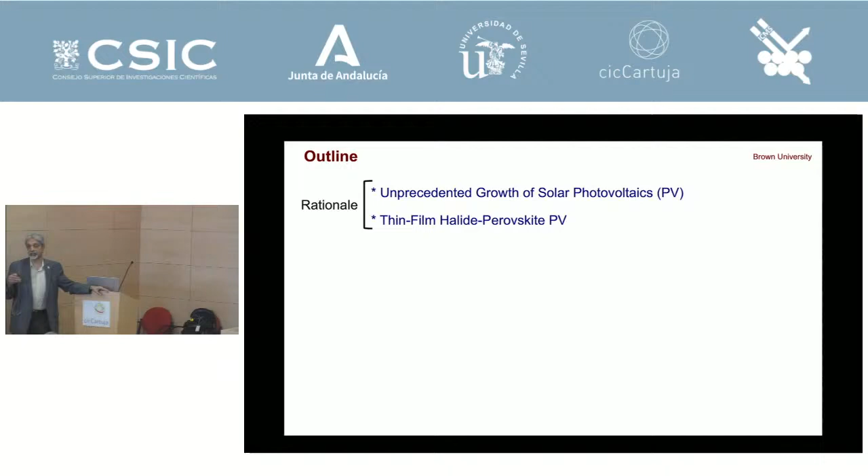So this is the outline of my talk. I'll talk about the rationale, why we are trying to do this, and hopefully I'll inspire you to think that solar is really the future, and any innovation you do in solar is actually very worthwhile. Then I'll tell you basically two stories. One is about mechanical behavior and how it relates to the performance, stability, and durability of these devices. The second story is about flexible solar cells, made on plastics or flexible materials, and how we discovered a new mechanism which will hopefully help us improve the durability of flexible solar cells and why we use them.

And then I'll end with some outstanding issues - what are the issues that are outstanding, and hopefully that can inspire some of you to look at this field. Myself, I came from the ceramics field all my life - mostly mechanics of materials, ceramics, and processing. I did not know how a solar cell worked until 2012.

And I jumped into this field. As you can maybe tell, I still don't know quite about how solar cells work in some areas, but we are making contributions. You can bring something new to the table, and that's very important, very unique.

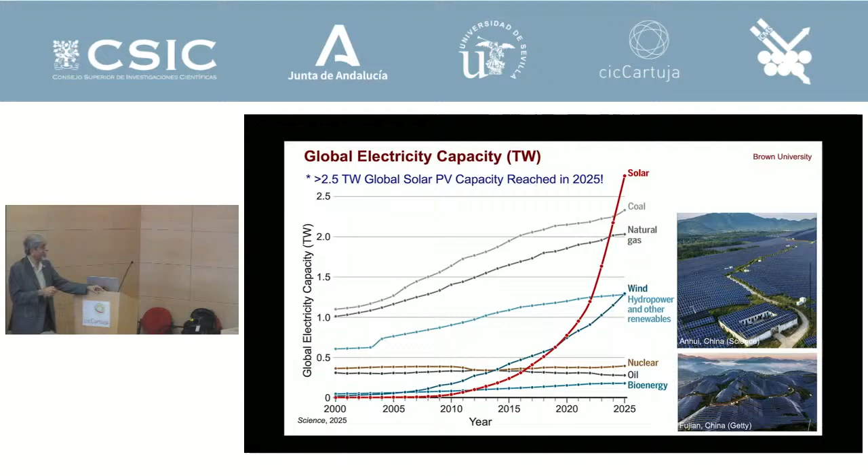This is the global electricity capacity, a chart from Science magazine. You can see obviously where you should be working. This is solar, which has really accelerated in deployment. Today we've reached over 2.5 terawatts of global installation in 2025. It's been exponential growth compared to other energy sources, and that's where the excitement is.

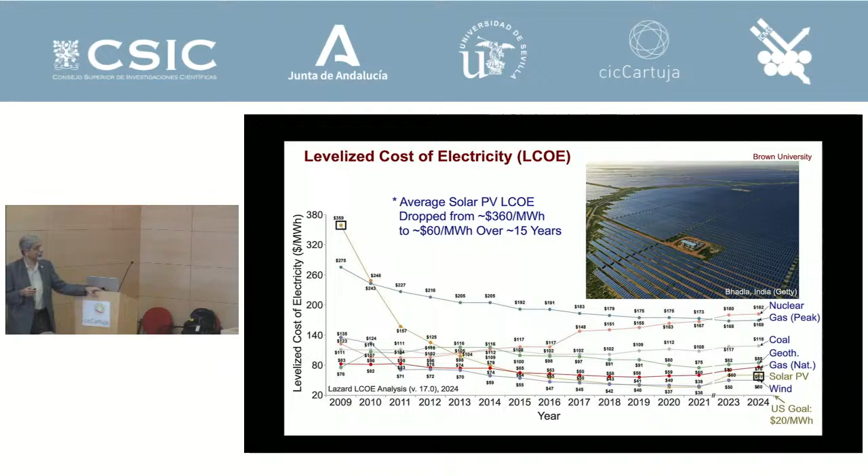Then cost—people think solar is very expensive. It used to be 10 times more expensive, more than that. But now we cannot complain that solar is expensive, because it's actually cheaper than gas, cheaper than coal, cheaper than almost everything. It used to be $360 per megawatt hour. Now it's $60 per megawatt hour, and the United States goal is $20 per megawatt hour—at least that was the goal when we started working on this. Maybe it'll come back to that goal again. But that's the situation.

Science magazine declared solar photovoltaics and renewable energy the breakthrough of the year for 2025. This is where the excitement is, and you have to be working in a field which is growing, not dying. Any contributions that scientists, material scientists, ceramics people can make is actually going to be very worthwhile.

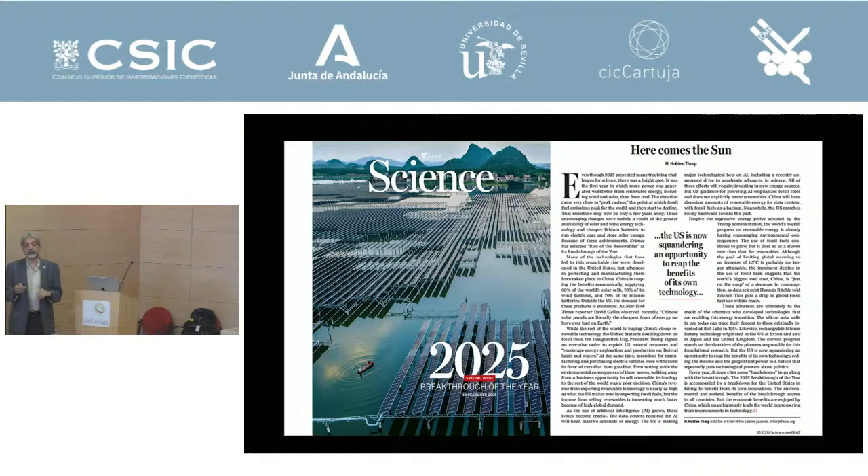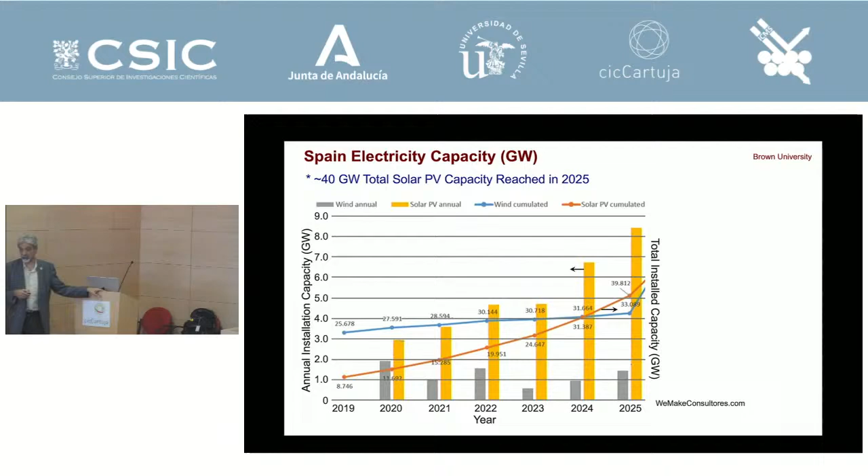In terms of Spain, Spain is actually leading the way. This is annual installations, and this is the total energy capacity. Spain has reached 40 gigawatts total installed capacity. Spain happens to be one of the rare countries where solar photovoltaics is actually the largest source of electricity among all other sources of electricity, so that's very exciting as well.

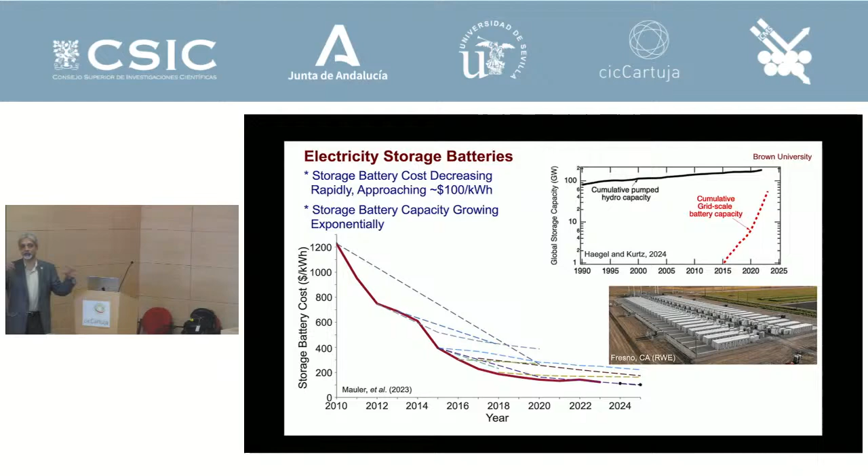Now, of course, the sun doesn't shine at night, so you have to have solar storage—I think everybody knows, and some of you are working in this field. If you look at batteries, the cost has come down to about $100 per kilowatt hour of storage. That is really a breakthrough. We never thought it would happen, because it started at $1,200 per kilowatt hour. That's amazing development, and the capacity is growing exponentially. So these are all coming together: solar, batteries, and storage.

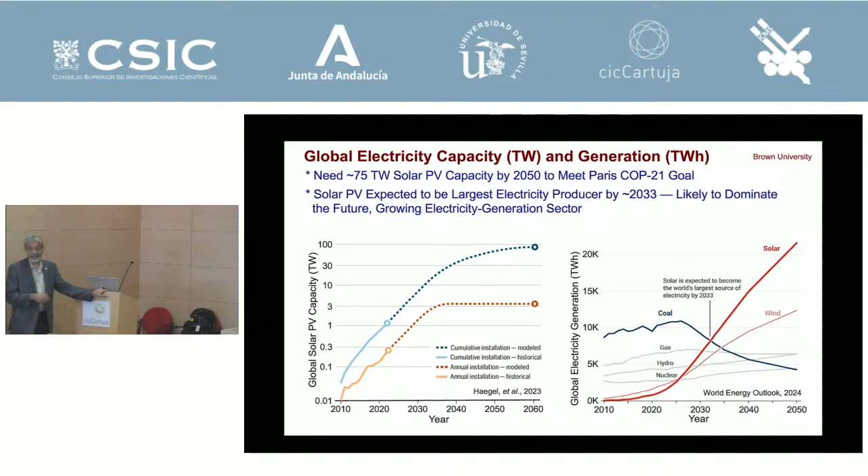There are some predictions that say we've reached about 2.5 terawatts of installation around the world, but we will need about 75 terawatts by 2050 if we are to achieve the COP21 goal of limiting warming to 1.5 degrees Celsius. By 2033, it is likely that solar will dominate the production of electricity.

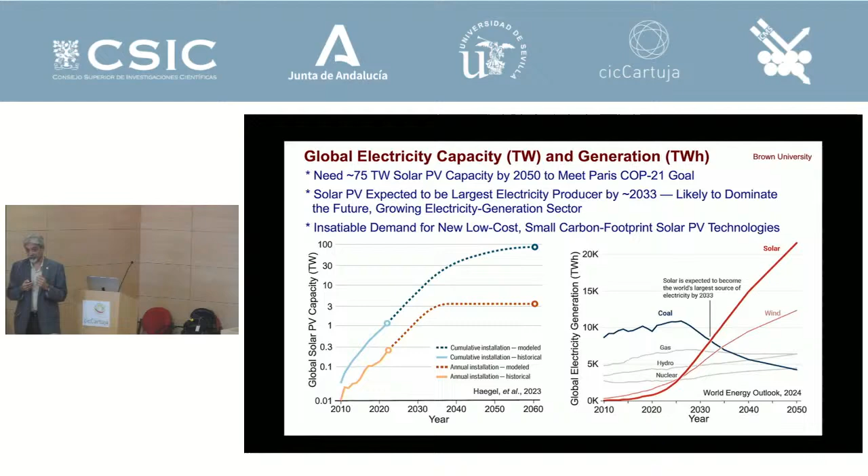What I showed was installed capacity, but production of solar will basically be dominating by 2033. And if your life depends on solar energy, if the economy depends on solar energy, the world depends on solar energy, we cannot be satisfied with the current technology. There's going to be insatiable demand for innovation, new technologies, because this happened in computers. Computers are essential, and that's why memory has become exponential, the cost has gone down exponentially. So innovation takes place when there is this tremendous need, and your life and your economy depend on it. That is my pitch, that solar is really a great field to get into, and you cannot be satisfied by established technologies like silicon. There always will be need for new things yet to be discovered. We don't know what new things will happen if all these great minds can come together.

With regards to solar, the cost is really coming down. This is the module price, back in the 1970s it was more than $70 per watt. This was the prediction made in 2010, and basically it has been achieved. Today you can buy solar panels that are about 25 to 30 cents per watt. It came down from $70 per watt.

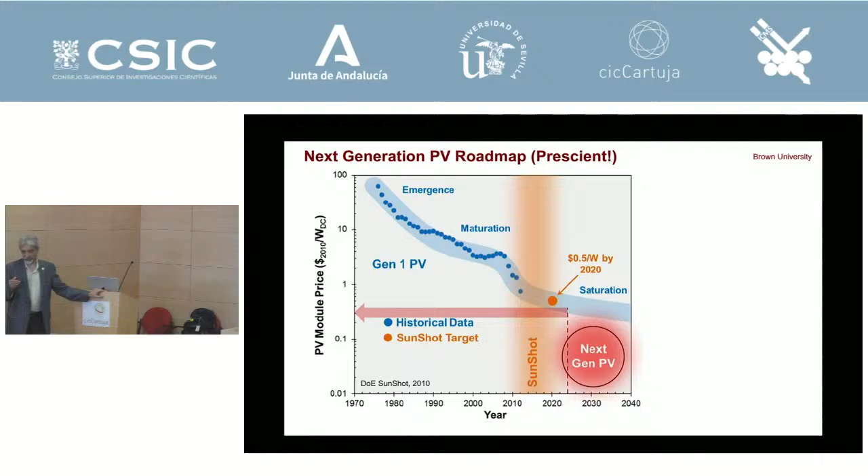But here is where we want to go: pennies per watt, 1 or 2 cents per watt. In order to get there, you have to have earth abundant materials in the solar cell. You cannot have precious metals, otherwise you cannot decrease the cost. You have to have small amounts of material, you cannot have large wafers or bulk materials. You have to use the minimum amount of material, even if it's earth abundant.

It has to be cheap to make. Solar silicon is basically melted — the melting point of silicon is 1425, so it has to be molten at 1600 degrees Celsius and cast into single crystals. There's a lot of energy that goes into it, a big carbon footprint. If you make solar cells at near room temperature, you're winning the game — you're reducing the amount of energy needed to make renewable energy devices, which is very important, and you get a small carbon footprint.

And the efficiency has to be high. If you look at the Shockley-Queisser limit for a single junction solar cell, the theoretical limit by physics is 33%. The solar cells you can buy, the best ones are about 25%, regular ones are about 20 to 21% efficient. Yes, solar energy is free, but you have to use large areas in the world to collect that energy and convert it into electricity. So the efficiency inherently is quite low, and if you reduce the efficiency of solar cells with new technology, which may use cheaper materials, you have to use more real estate. So we cannot compromise on efficiency.

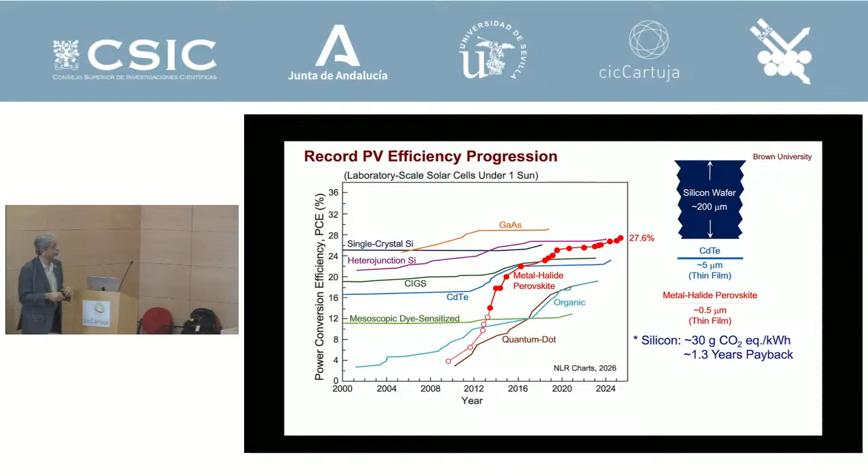And also, if you look at the payback time and carbon footprint, it is much lower than silicon. So this perovskite basically has the potential to satisfy all the requirements for this new type of solar energy for pennies per watt, in potential.

And by the way, if you actually combine perovskites and silicon, which is called a tandem solar cell — because silicon has a fixed band gap, 1.1 eV, it absorbs only a certain part of the solar spectrum, that's it, it's actually not a very good solar material.

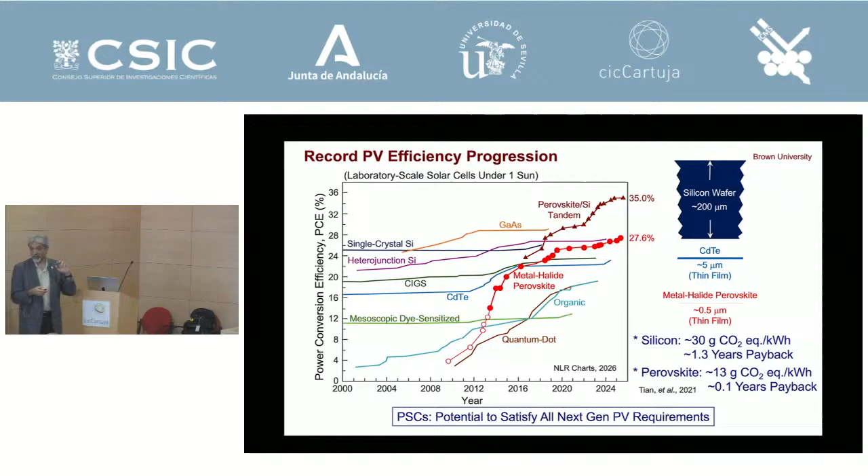You can add perovskite, which can be tuned to maximize efficiency, up to 35%. So with new technology, you're not just replacing old technology. By virtue of these new materials, you have new functionality. It's different, it doesn't fit in the same slot, it has its own new properties. You can use this for tandem cells, on top of silicon.

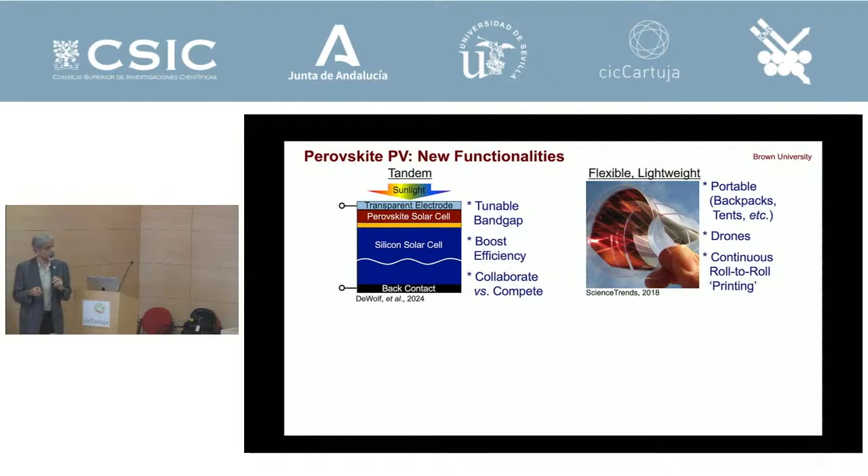Since these are thin film materials, 500 nanometers deposited at near room temperature, you can put it on plastic, lightweight for drones, tents, deployable solar cells. You can tune the band gap and make it building integrated, so you have a wall collecting sunlight, producing electricity, and looking beautiful. You can't do that with silicon. Silicon is ugly black.

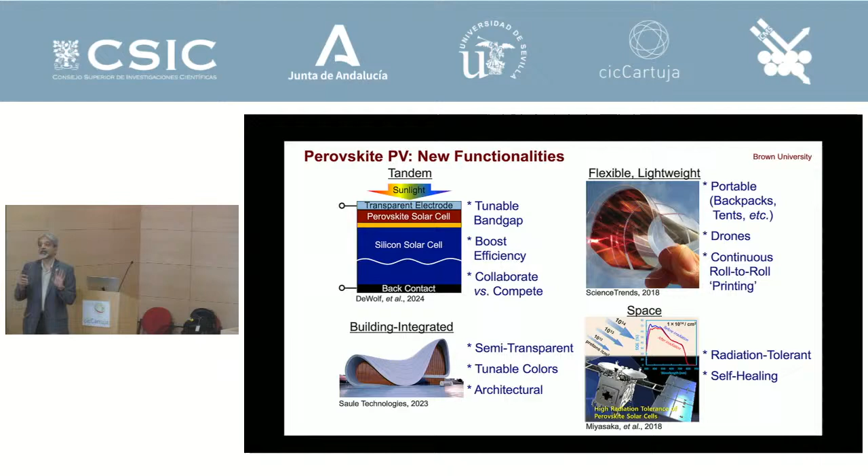In space, perovskites are also radiation tolerant. Silicon is like a stone, a rock, like gallium arsenide. When it gets damaged by radiation, atoms get displaced but they're stuck there, so that's permanent damage. These are dynamic solar cells. They may not be as efficient as gallium arsenide, but when the sun isn't shining or the satellite faces the other direction, it can heal and the atoms go back to their original position. It can recover. There's a lot of excitement in perovskite solar cells for space applications.

I'm advising a student group, a completely undergraduate group building a CubeSat, and NASA is going to launch this with perovskite solar cells into space to study how solar cells behave there. I'm really proud of what the undergraduate students are doing. They're designing everything, including the CubeSat, the electronics, the avionics, and it's amazing.

For people not familiar with the perovskite structure: this is the AMX3 structure, the 3D structure. M here can be lead or tin. Then you have X, which in ceramics is typically oxygen, but here we have halide—iodine, chlorine, or bromine. Then you have the A site in this cage, and this cage is quite large, so none of the monovalent cations can fit in there properly; they rattle. As anyone knows from beginning ceramics crystal structures, you cannot have rattling atoms inside a structure—it has to be snug.

Cesium barely makes it. Francium would make it too, but it's radioactive, so you don't want to use that. So you have to use cationic molecules to stabilize the structure. One popular one is methylammonium, and another is formamidinium. For ceramics people, it's fascinating that you have an organic molecule that's actually rotating—when it sits there, it doesn't stay like an atom, it spins, and you still have a crystal. It's very different for ceramics people to think about these structures, and that took me a while too. But these are fascinating materials called hybrid, or inorganic-organic.

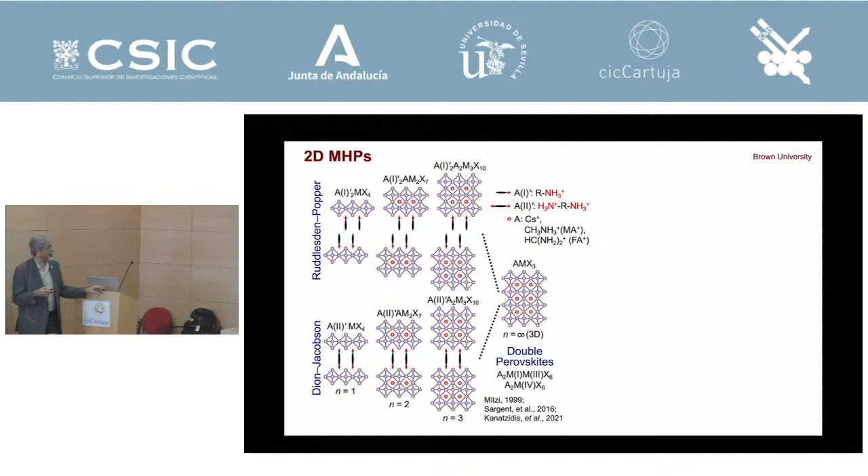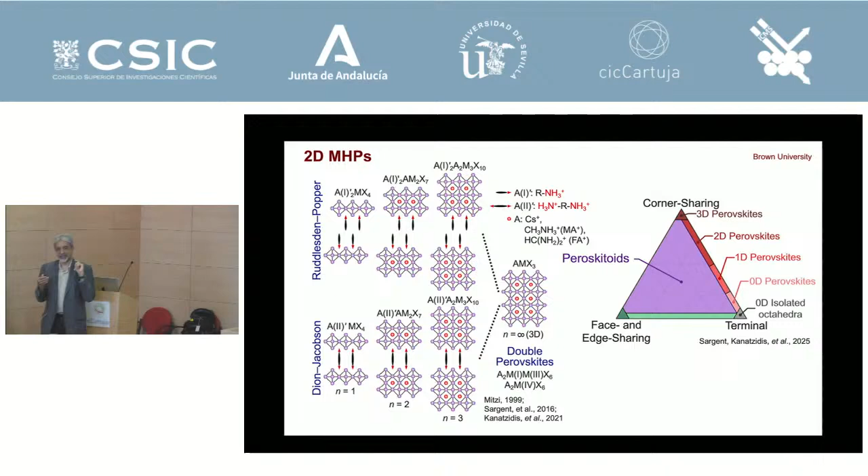It turns out this is only along one line—3D here, 2D there. You can also have 1D, 0D, and what are called perovskitoids. The family is massive; you have millions of compounds you could make. It's really a big playground, especially for people doing AI and machine learning, because we don't know many of these compounds—we don't even know if they exist, or whether they can be made. But you can discover interesting properties in this space, which could be the next best solar cell, for example. So that's the story.

So why do these work in perovskite solar cells? Why is the efficiency so high? And this will happen so fast. Gallium arsenide took decades because they had all these problems.

The first reason is they're excellent light absorbers. This is the solar spectrum. This is silicon, on a log scale here. As you can see, silicon is a lousy solar material—it doesn't absorb light very well. This is gallium arsenide, which is like the Ferrari of solar cells. And this material is actually better than your Ferrari at the cost of a Peugeot, okay?

So that is the situation. You can make a kind of quick and dirty solution-processed film, and you can get more absorption than gallium arsenide. And that was a puzzle in the beginning when people started working on this.

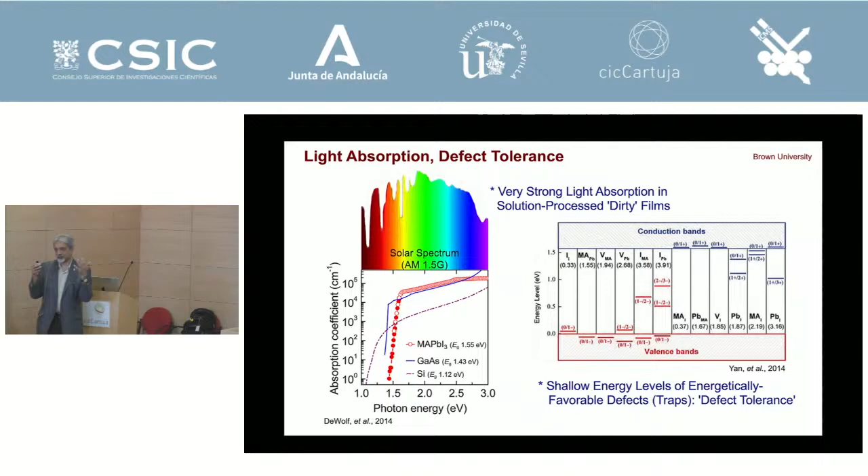I was involved in a lot of the early thinking on this. The reason is that the defects that form in these crystal structures, the point defects that are energetically favorable, are very shallow—close to the valence band or the conduction band. None of these deep defects are energetically favorable. So this is like a gift from God—let's make it secular, a gift of nature—that the defects are actually very benign. That's why you don't need to perfect the film, and it can still absorb light very well.

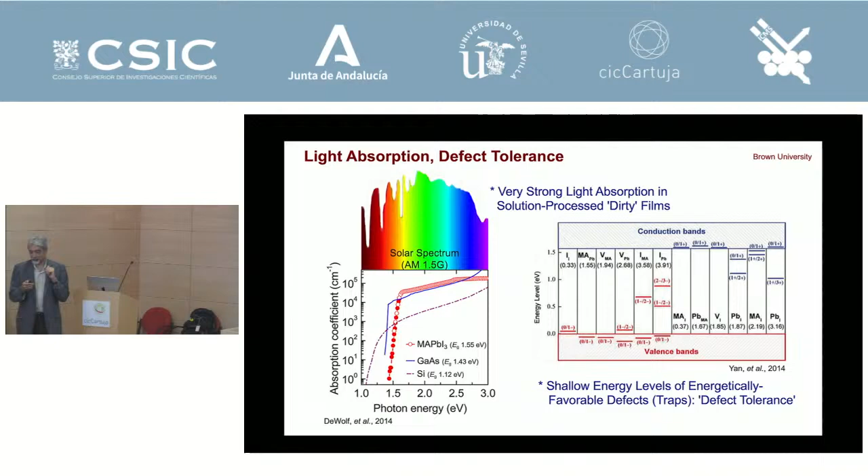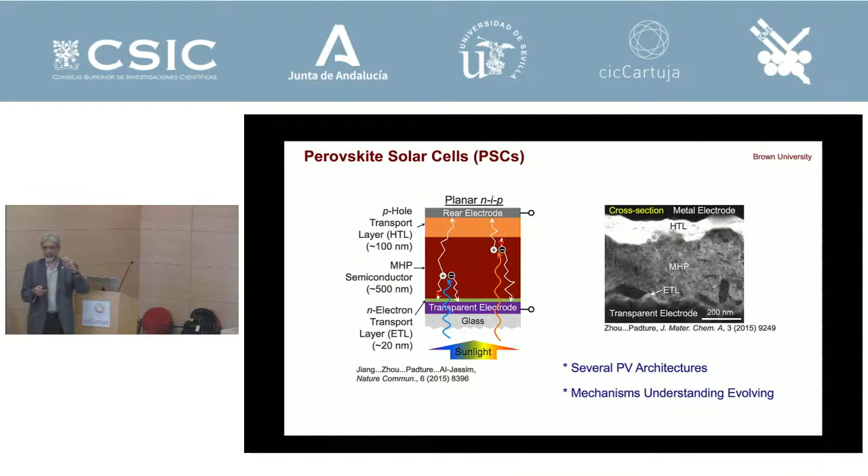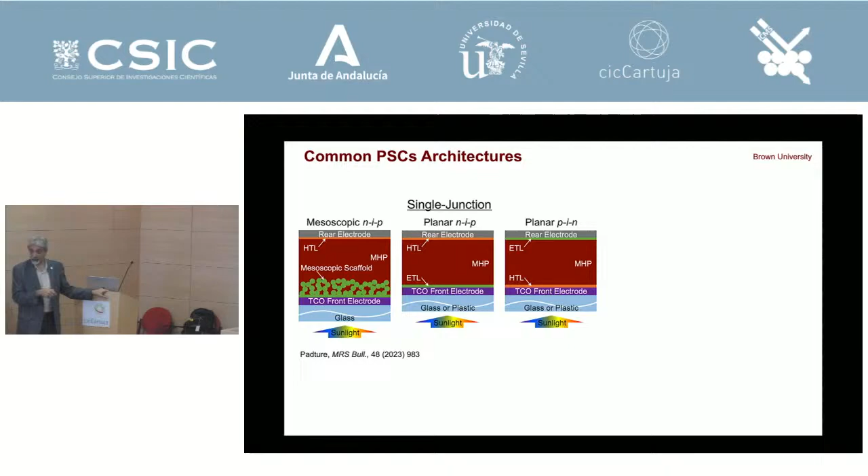And of course the understanding is still evolving after so many years. There are a variety of these structures. This is called mesoscopic, where instead of just a flat N-type layer, you have a composite here, with a flat layer upside down—the HTL, or P-type, on the bottom, and N-type on top. They have different advantages and disadvantages.

When you have tandem, you can have a 4-terminal configuration, where these are 2 separate solar cells on top of silicon. And this is what is called a 2-terminal tandem, stacked on top of each other with an interconnection layer.

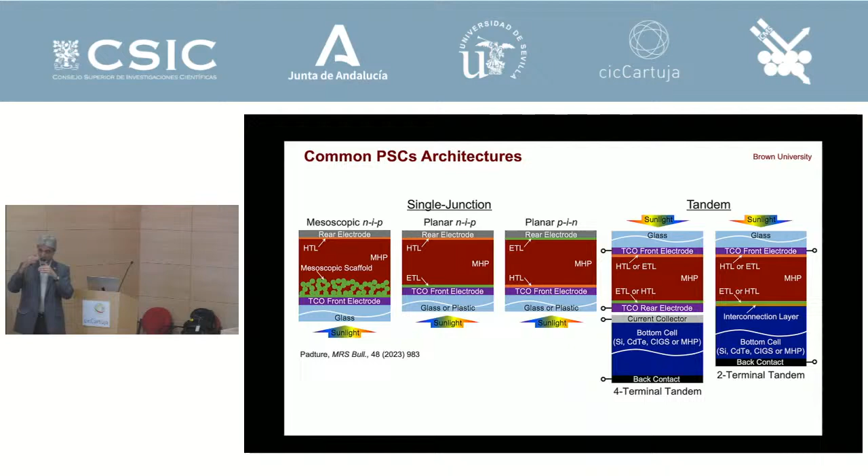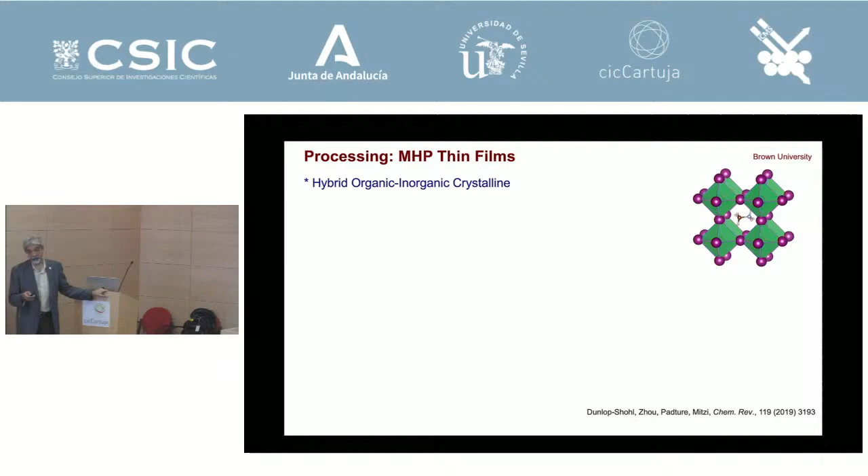Processing of these films is actually quite easy. These are hybrid materials with quite low formation energy. The melting points are very low, and they can dissolve in ordinary solvents to make a clear solution. Then you can deposit them using what's called a beakers-and-benches approach, with continuous deposition.

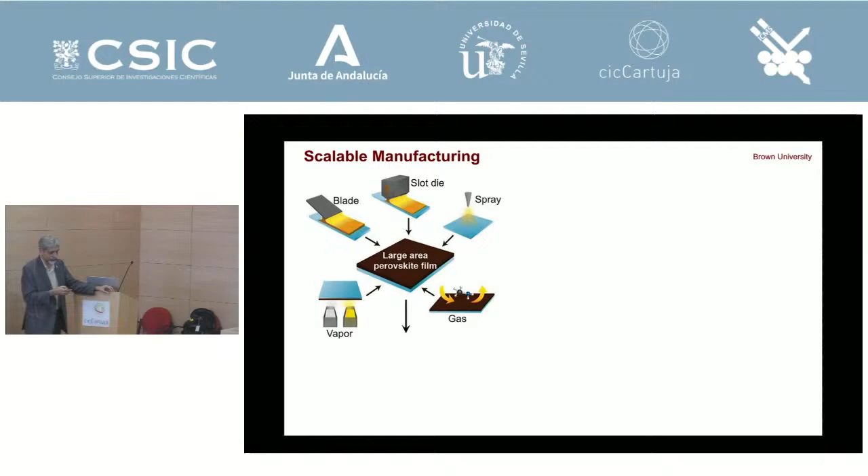There's a lot of work going on in different scalable methods. You can use gas, vapor, spray, slot die, blade coating, and deposit all these layers. This is a production line for rigid solar cells on glass substrate, or you can deposit on polymers and have roll-to-roll continuous manufacturing. So it's highly scalable and has low capex—capital investment.

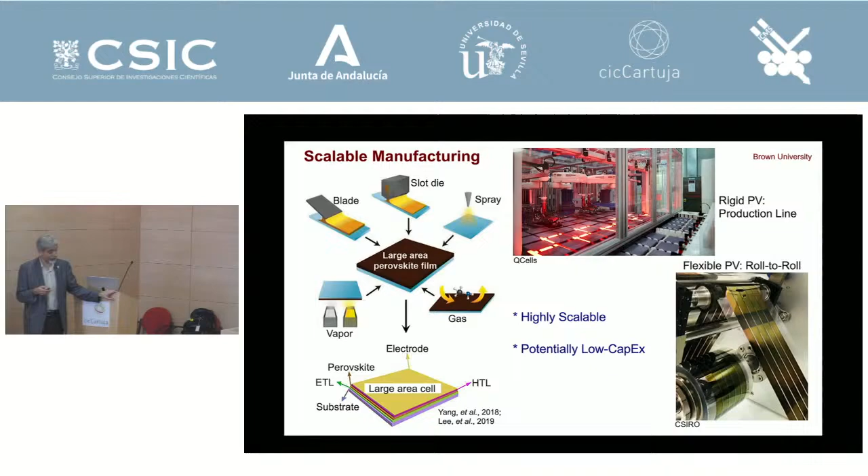All right, so the first story I want to tell you, that was sort of a background, is about mechanical properties of rigid solar cells and its connection to durability, because that's one of the problems. Efficiency is great, but these materials are on the cusp of stability. That's why they're easy to make at room temperature, but they're also easy to break, very easy to destabilize. So that's where the innovation lies: take advantage of easy to make, but make it difficult to degrade or difficult to break.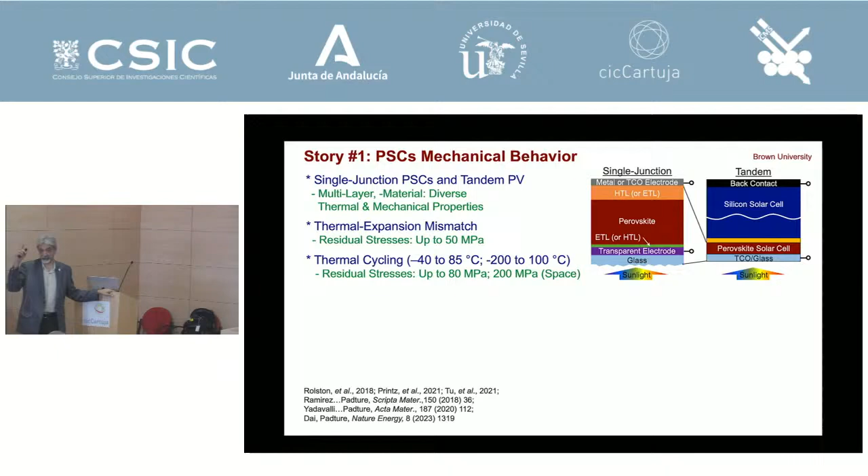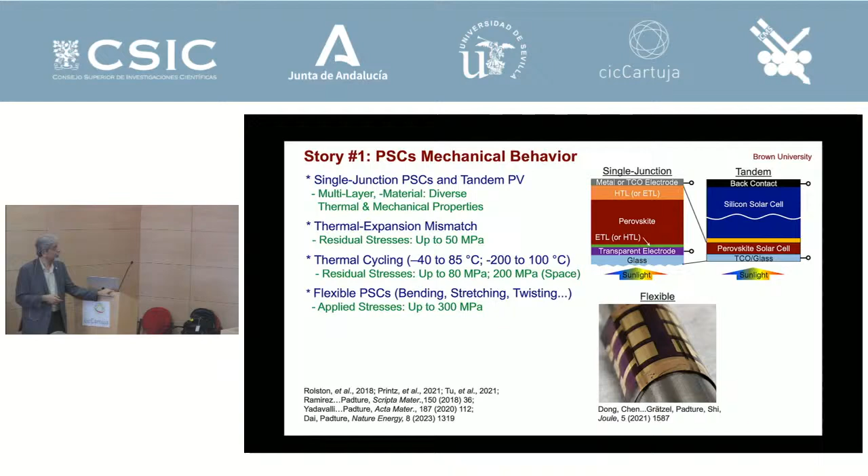So anyway, you have multiple layers with diverse thermomechanical properties, and therefore you end up with residual stresses that can be as high as 50 megapascals. And thermal cycling, these have to be tested from minus 40 degrees, like Siberia, to 85 degrees, like Andalusia. And in space it's minus 200 to 100 degrees Celsius, so that range is huge in space thermal cycling. The stresses can be even higher, 80 MPa up to 200 MPa in tensile stresses. And if you make flexible solar cells on plastic substrates, the stresses can be even higher, about 300 MPa.

And the problem is the stresses would be okay if the properties of these materials were good, but the properties are really bad. The toughness is low, so they break if you look at them the wrong way - you don't even need to apply stress. The hardness is low, the stiffness is low, and the interfaces are very weak, so they fall apart. My ceramics friends laugh at me, they say 'why are you working on this?' I worked on structural ceramics, highest toughness composites, and so on. But the reason we are working on it is because they absorb light like crazy. Ordinary ceramics don't do that. This is a very unique material, and therefore we have to solve the other problems in order to take advantage of this.

All right, so my famous photovoltaics colleague basically said that solar cells don't work if they fall apart. So that's my job now, is to bring in the ceramics and mechanics expertise to try and address this problem of reliability.

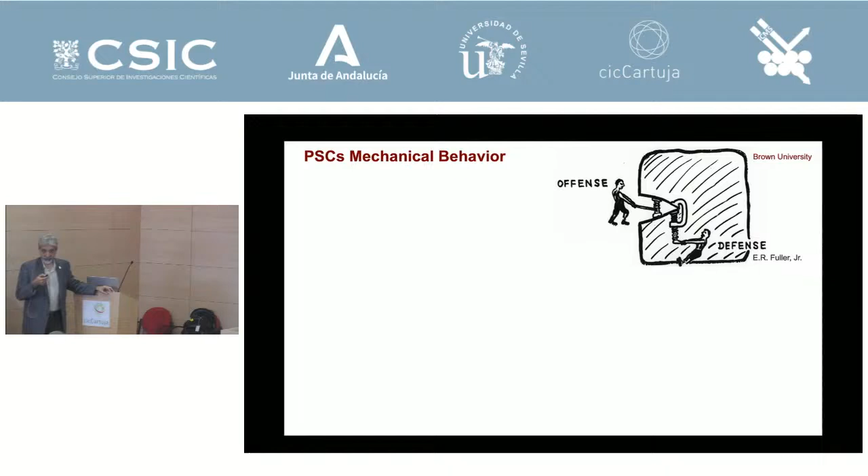Okay, so a tutorial for people who may not be familiar with mechanical properties. You basically have offense, that is stresses, and you have defense, the properties of the materials. So you always have this competition. Obviously the properties win, which is why I'm standing here, the floor is not falling, the ceiling is staying. But eventually the mechanical properties degrade over time or cycles, and the stresses can either build up or relax. And so where they meet is where failure occurs. And it's stochastic because we don't know when it's going to happen, because there are so many different considerations of how it's degrading, how the stresses are building, and where the weakness is.

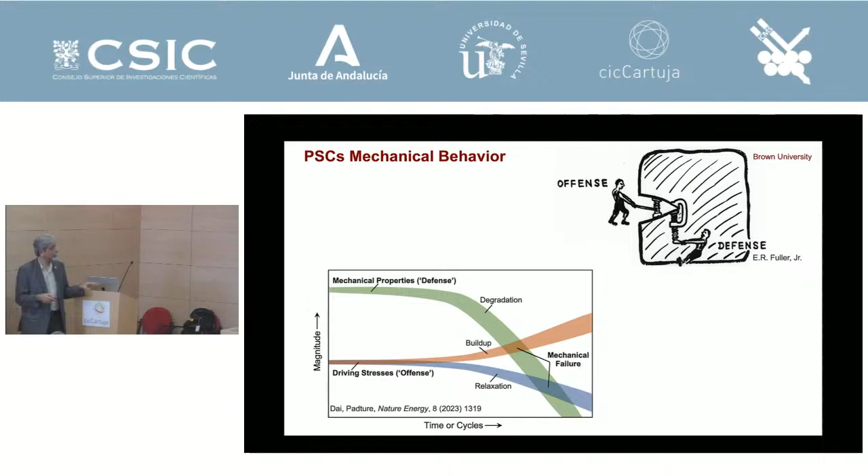And therefore we use - I'm not going to go into the details of this - but that's why we use Weibull statistics, like weakest link statistics, to do this. And so we study reliability and durability.

All right, so when we started working on this, the most basic property, which is Young's modulus, was actually not measured. So it's like starting an optical materials project without actually knowing what the band gap is. So the first thing you do is measure the band gap. So the first thing you want to do is measure the Young's modulus.

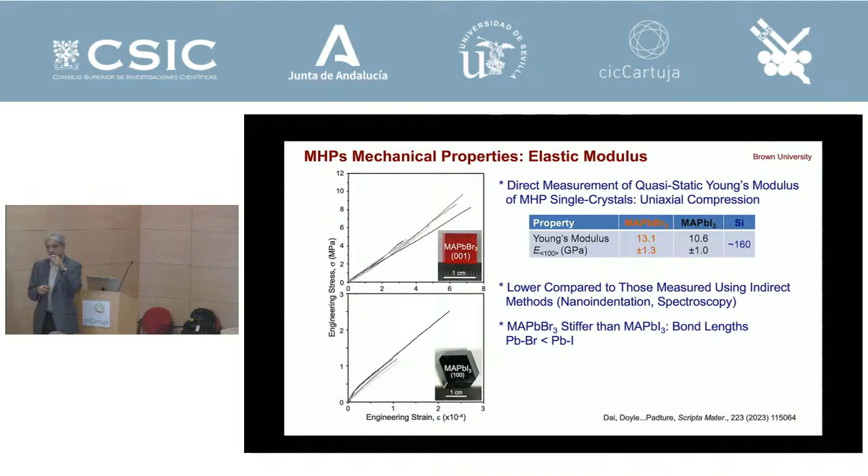And so we made single crystals. You can actually make single crystals very easily at room temperature, but with some expertise - you just leave it in the beaker for a week, and you make beautiful centimeter-sized crystals. And so we did direct measurement using stress-strain in compression, and measured the Young's modulus. For example, this is MAPbBr3, and this is MAPbI3. This is about 13 GPa, this is about 11 GPa, compared to silicon, which is about 160 GPa. And by the way, the reason why this is stiffer is because it's basically controlled by the lead-bromine bond, and that bond distance is smaller in the case of bromine compared to iodine. That's why this material is stiffer. That's the work of my former PhD student.

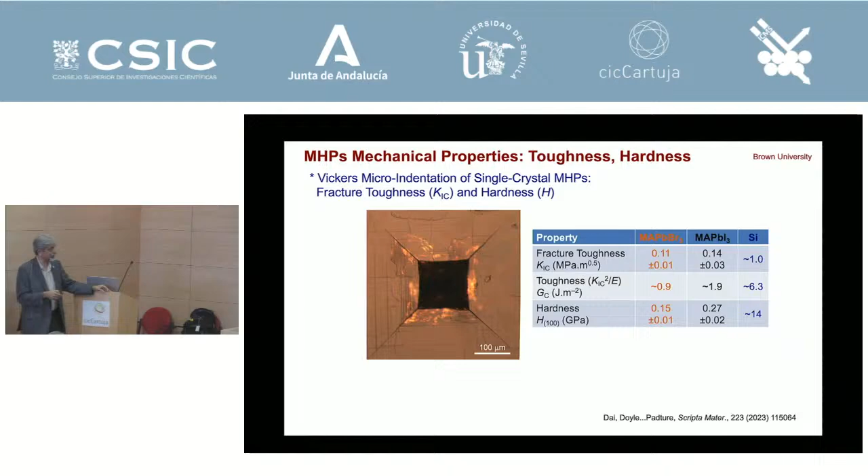And then we measured toughness. So indentation is very familiar to everybody - toughness on single crystal. And you can see these are depressing numbers: this is 0.1, this is 0.14, silicon is 1, something like titanium is 50. So these are not very encouraging numbers, and this is in terms of energy. And then the hardness also is very, very soft. They're like salt - these are salts, they're halide, like table salt. You can crush salt very easily.

So this is 0.15, 0.3 — silicon is about 14, alumina is about 19, diamond is 40. If you put these on an Ashby map, you'll see they fall in the white space — they don't fit any particular category. They're a very unusual combination of properties. So for the material scientist, it makes these materials interesting just from the science point of view, whether they're solar cells or not, because of this fascinating combination. Why are they here and not among any of these things? That's very fascinating.

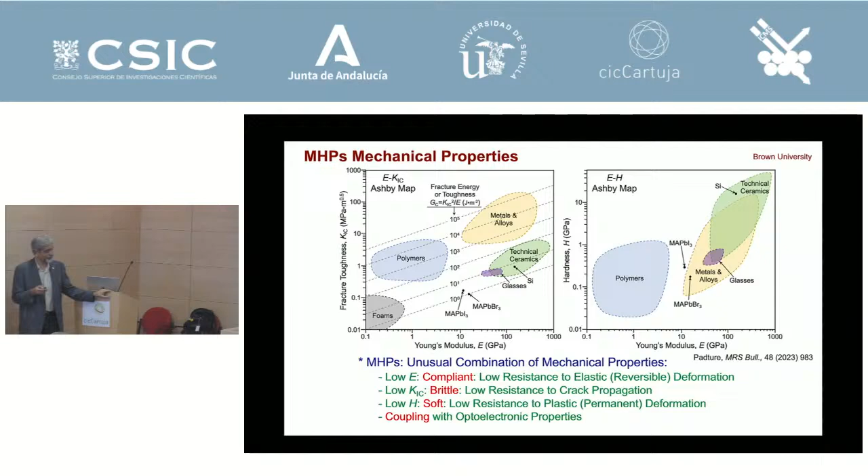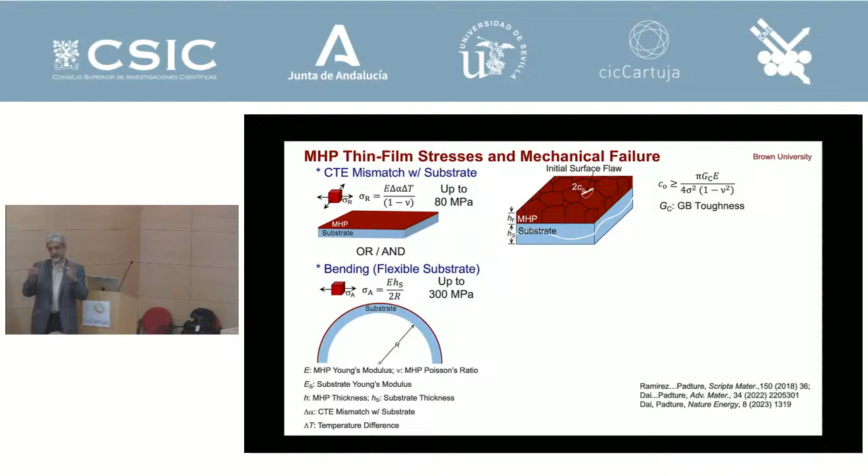Anyway, so we have residual stresses, and then we have the material properties. By the way, we measured the properties of thin films as well, but I don't have time to talk about that. You have these residual stresses, which can be amplified if it's bending. Then you can have cracks — there are always cracks — and these stresses act on those cracks. When the cracks reach a critical size, they propagate, and you get what are called channeling cracks through the thickness of the film.

These cracks by themselves are actually not a problem because they're very thin, so the area reduction is maybe 1%. The carriers, the electrons and holes, are going up and down, so they don't care where this crack is — it's only a loss of 1% area, which is nothing.

But from a mechanics perspective, if you know thin film mechanics, when you have a free surface, you can produce interfacial cracks — for an interfacial crack, you have to have a free surface. The free surface is at the end, but if you have a meter-square film, that's very thin, and the crack can only be there — there are no interfacial cracks there. But if you have a series of these vertical cracks, you can form interfacial cracks. That is a kiss of death for the solar cell, because the carriers can no longer flow — they're blocked. So these vertical cracks act like a catalyst for the interfacial cracks, because they provide an array of internal free surfaces.

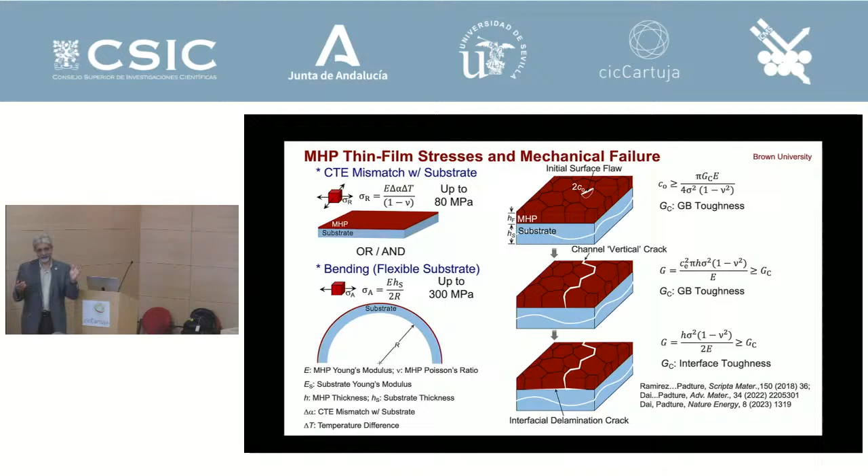So we need to prevent these. But if you cannot prevent them, because these are very brittle materials, you cannot really use composites and things — for example, if you put carbon nanotubes in, forget it, you cannot. It has been fine-tuned; you put anything in there to try to toughen it, and it's going to kill the properties. So what we thought is that since we cannot prevent this, why don't we toughen the interface? You could put super glue there and it would be perfect, but the solar cell would be dead, because it's also so fine-tuned.

So what we started working on is using what are called self-assembled monolayers — many of you may know these. This is a very famous self-assembled monolayer called silane, which is used in fiber reinforced composites — all fiber reinforced composites, sold by the tons. Silica fibers are covered with a silane SAM, and then it's embedded in the polymer, because that gives you the bonding between the fiber and the polymer for stress transfer.

Our innovation here was to terminate this with iodine — it's called an iodinated self-assembled monolayer. Also, it's short chain and cross-linked. We measured the toughness using what's called the DCB technique, double cantilever beam. We found that when you put the SAMs in, the toughness goes up by about 50%, because of the anchoring of this and the anchoring of the iodine into the metal halide perovskite — MHP is the metal halide perovskite.

So we worked with a colleague who does DFT modeling. This is the iodine termination of the SAMs, and that's the perovskite. What we discovered is that there are actually two kinds of bonding. One is the iodine in the SAMs bonding to the undercoordinated lead in the perovskite. The other is a halogen-halogen bond between the iodine in the SAMs terminal group and the iodine in the perovskite.

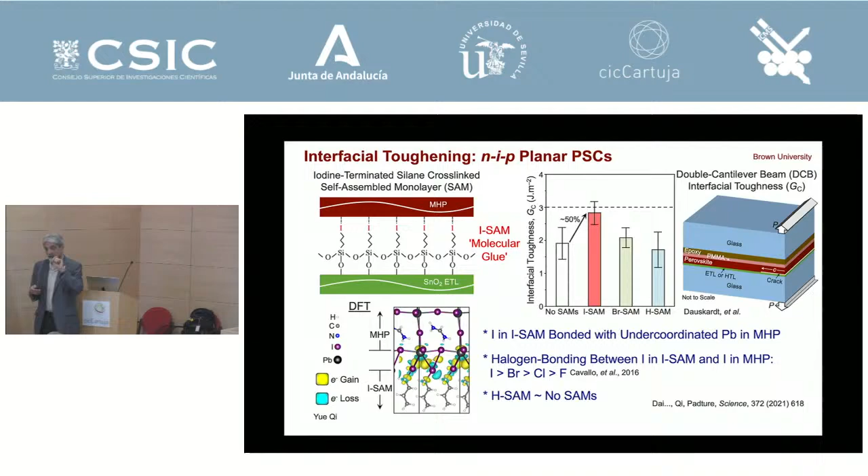But this is like a seesaw. If you increase the band gap, your open circuit voltage increases, but then you absorb less light because your band gap is bigger, and therefore the JSC goes down. So it's like a seesaw.

So for students or postdocs or whoever wants to, I put together this animation to understand how solar cells work. You can think about it in terms of water—this is basically rain or sunlight being collected in a tank. The VOC is the potential, that's what's called the head. And JSC is what's called flux.

So for example, if you decrease the band gap, your JSC, your flux, increases, but your head decreases. If you increase the band gap, your JSC decreases, but your head increases. So that's always a seesaw compromise. If you have friction, you get loss of JSC, what's called scattering. And if the tank is leaking, you get loss in VOC. You don't want any of these.

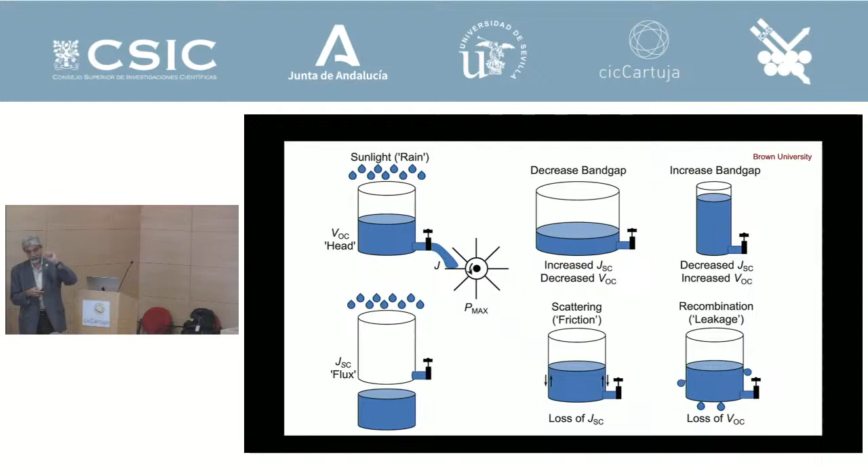So you open the tap and turn the turbine—that's your flux, and this is where the power max comes; maximum power occurs at the maximum of that curve. Whatever water doesn't go on the turbine and spills is your FF. You want all the water to go on the turbine, but practically that's not possible with these devices. So that's how the solar cell basically works, and how we can play with the band gap, FF, and friction to maximize the efficiency of these solar cells.

So this is what's called stability. We basically use the maximum power points—it's a very severe test, because normally solar cells don't operate continuously for thousands of hours. They work for 12, sometimes 14 hours in summer, and then it becomes dark and they can relax. But this is a very severe test, and it shows that if you don't put the SAMs, if you don't toughen the interface, the T80, meaning loss of efficiency by 20%—so it retains 80% of its efficiency—that time is about 700 hours. When you put the SAMs, across 3 different devices, it can go up to 4,000 hours.

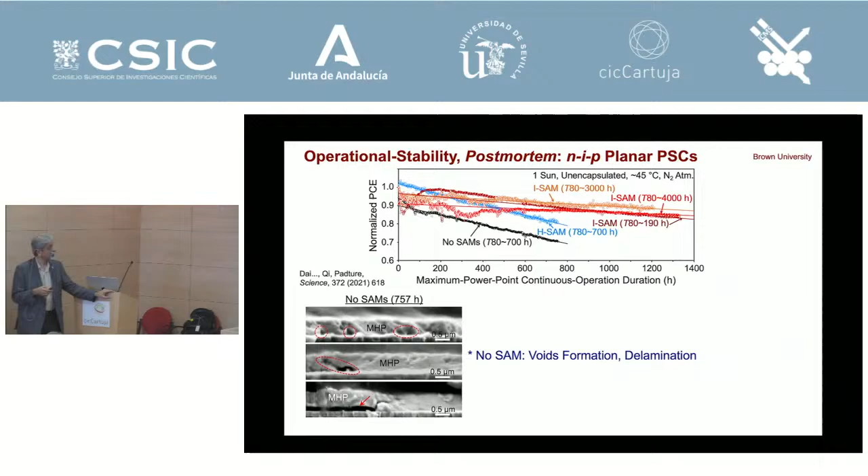And so if you look at the solar cells after testing, you take them apart and you'll find voids and delamination. But when you have the SAMs, you can see that after testing the interface is relatively pristine, which is why the solar cell lasts longer.

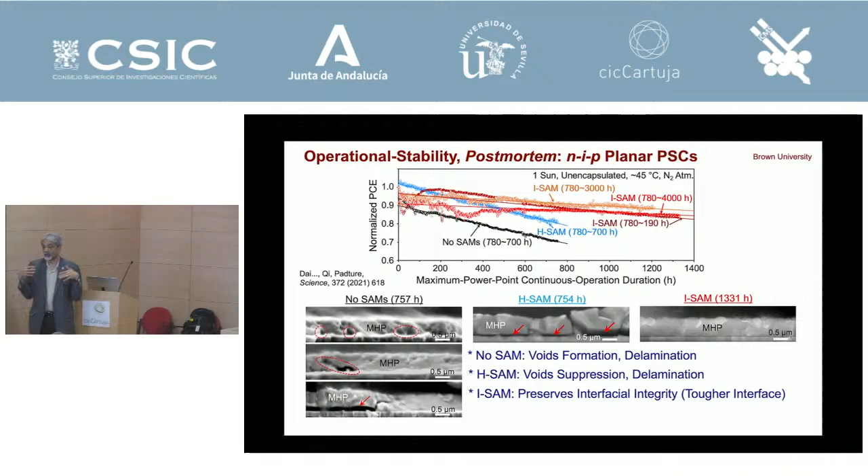To me, as a mechanics person, it makes sense. If you make the interface tougher, it's going to be difficult for it to come apart during operation, because it's a dynamic solar cell, not like silicon. In silicon this wouldn't be a problem because nothing is moving, so this approach wouldn't work in silicon—it works only in this system. Anyway, so that's the connection.

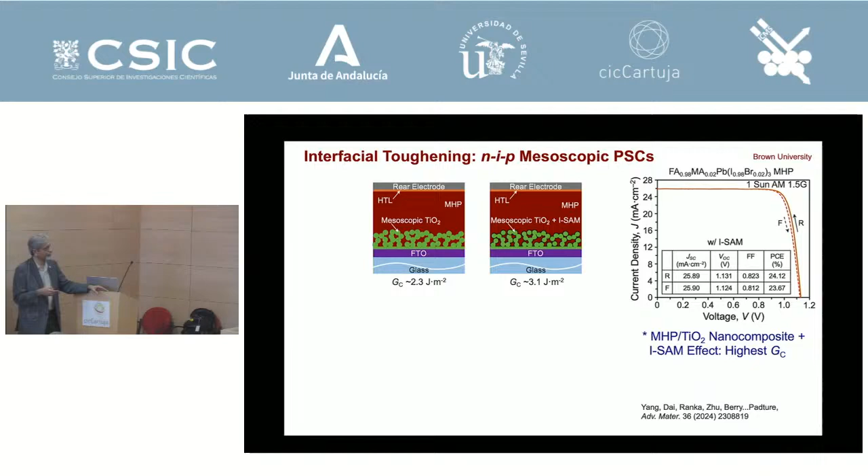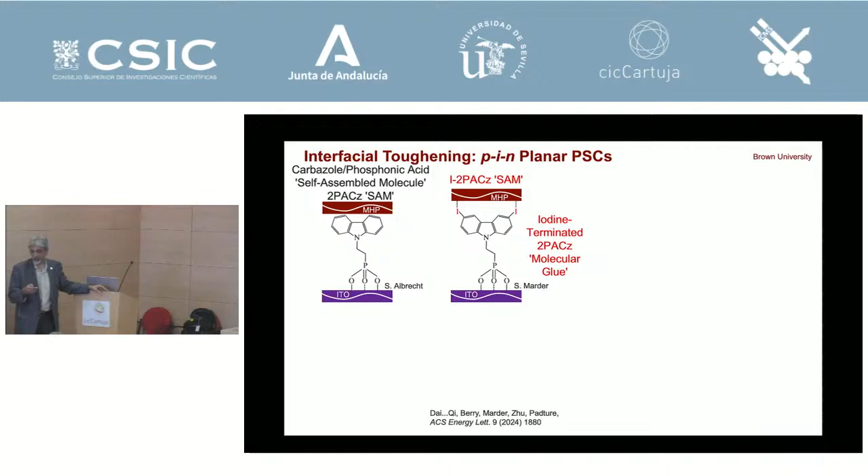And then we did things with the mesoscopic structure, the toughness is even higher, the efficiencies are even higher. Same story with the stability. And then you reverse it, make it upside down, PIN structure, and you put another different kind of SAMs called carbazole phosphonic acid SAMs, and the toughness here is even higher, and the efficiency. We also adjust what's called the dipole, because it's charged SAMs, and it results in efficiency that's even higher, 26%. So the record is 27%. We're getting close to the record efficiency of solar cells in the world. And these are some statistics, and that's the efficiency.

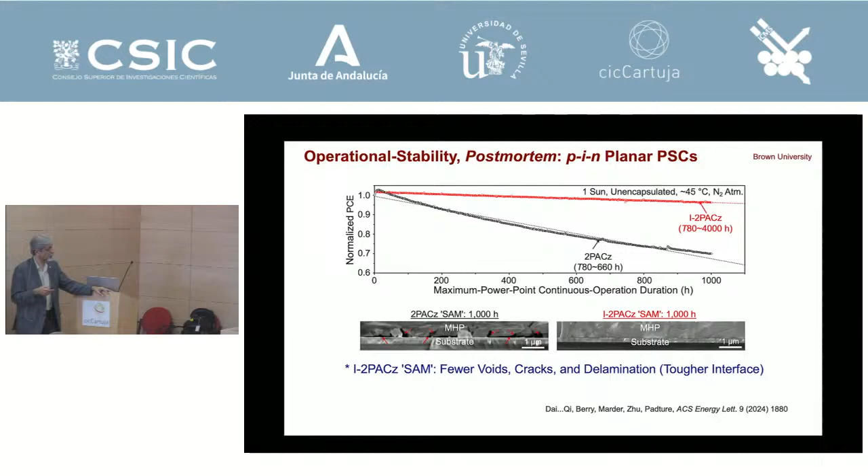And that's the post-mortem characterization. To me it seems like if you don't toughen the interface, it's like putting a wire on a conductor, and putting a toughening layer is like soldering it. Which is better? It's a no-brainer to me. But it's very hard to convince the photovoltaics community that they should be thinking about mechanical properties or mechanical behavior to make their devices stronger.

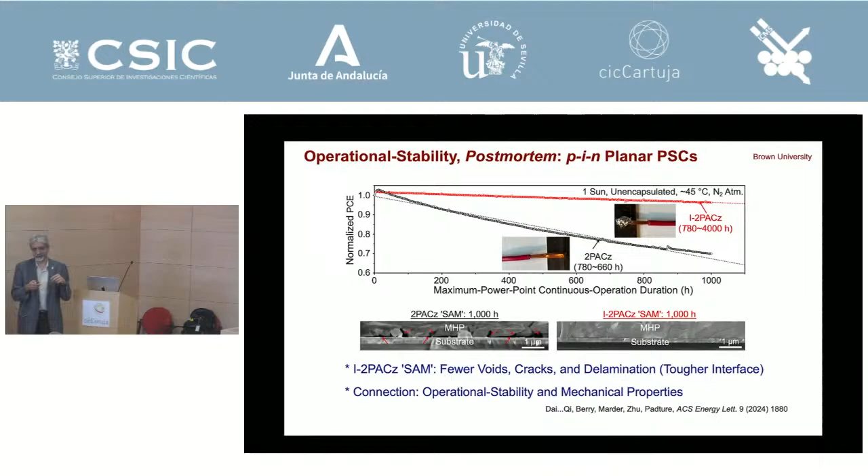All right, so come to the second story.

So the second story is about flexible solar cells. Flexible cells, as I mentioned, are deposited at near room temperature and take only 500 nanometers, and therefore you can make it flexible. A 200 micron silicon wafer is not flexible. You can imagine it just breaks into a million pieces if you try to bend it. So that's the advantage. Another advantage is they can be produced at mass scale by a roll-to-roll continuous process. And they have very unique applications.

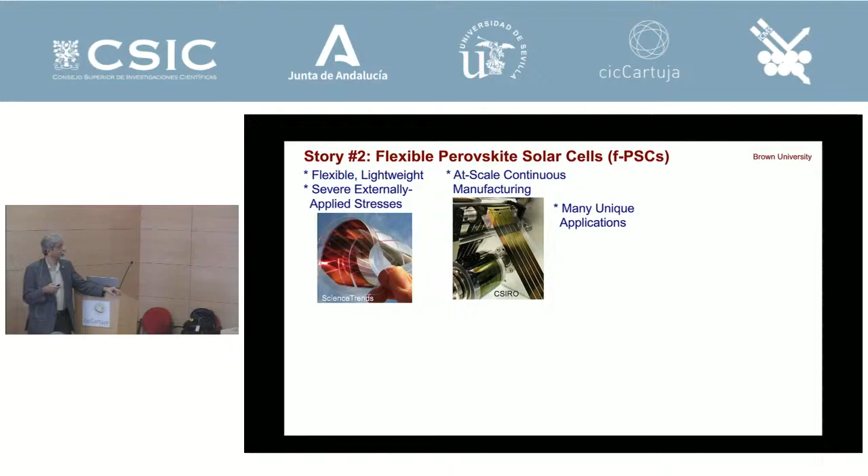For example, you can put them on tents and collect power. You don't need it on the grid. You can put them on drones. They're very lightweight, and that's all power. Power is the biggest problem in drones. The batteries are the biggest problem in drones.

They can be put on wearables where you can collect indoor light, because these, I didn't say this, but the indoor lighting performance is very good here. They work very well in indoor lighting. That's what it says here, indoor and outdoor, powering the Internet of Things.

And then space - so basically, like an umbrella, you need a large area, you cannot take this big umbrella in a rocket, so you basically take it as a closed umbrella and then unfurl it in space, and it has to be flexible, of course, and collect a lot of light.

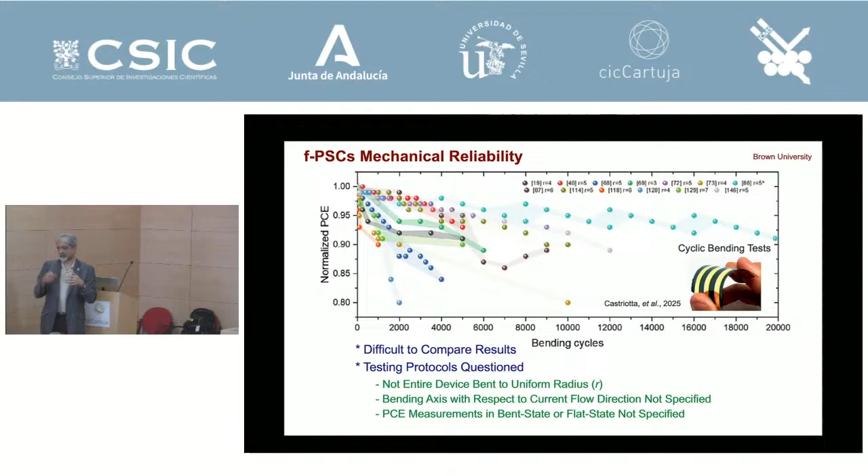Anyway, a lot of people do testing by bending this. So the mechanical testing is done by bending many cycles, and basically people plot the remaining power conversion efficiency as a function of number of cycles and say that this is fatiguing. But there's a lot of problems here - I won't go into the details, but the tests are not conducted properly, and this cannot be compared well. And therefore I got involved in this consensus statement with many authors.

Basically we came up with some recommendations: you have to bend the entire solar cell to a uniform radius, so everything is in the same stress state. Then the recommended strain, the number of cycles, and the choice of axis is also very important, because a lot of people were bending it in the wrong axis - because if the cracks go this way and the current goes this way, it doesn't affect your current, and so you see very high efficiencies. The current has to go parallel, perpendicular to the crack axis. And so on, but I won't go there.

So this is our own solar cells. The flexible solar cells are typically a little bit less efficient, about 21 to 22%. So these are our own solar cells that have been tested, and you test it under bending like this - this is a torture device. And then you stop after a few cycles and measure the efficiency, and then you cycle it again, and measure the efficiency in the flat state, when the solar cell is flat. We use a rod here, a mandrel, so that the stress is uniform over that area.

But the mechanism of why this happens was not understood. People basically said, well, they're brittle materials - the normal hand-waving explanation, which makes sense: you say brittle materials get cracks, and the cracks multiply with number of cycles, and everything sort of decreases. My student was not satisfied by this, and this is where a lot of the curiosity of students really drives the research.

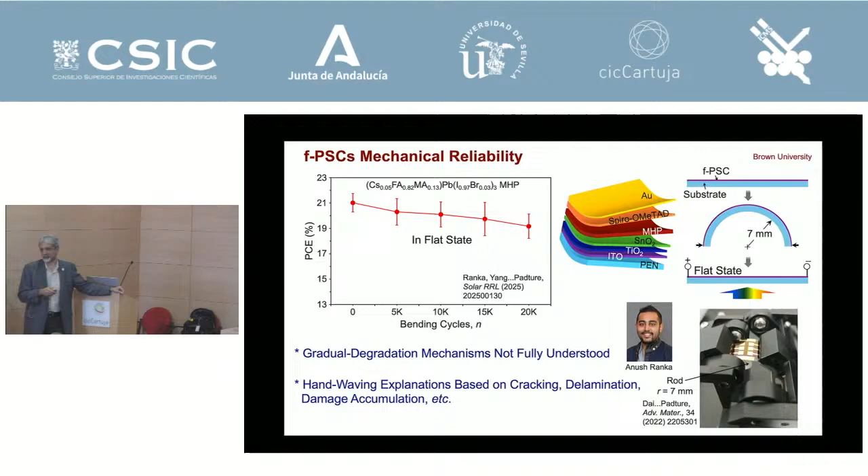I was happy with this explanation. Sounds reasonable to me, right? And we even published papers based on this. And so he basically said, okay, I need to understand this. I'm going to go back and reduce the problem to the minimum level, okay?

So there's something called TCO, transparent conducting oxide, on the substrate. That's the essential part, because it has to be transparent, light should go in, and it should be a conductor to collect the charge. It's typically made of ceramics such as ITO, indium tin oxide, or IZO, indium zinc oxide, and other materials. They're very unique materials that can conduct electricity and also be transparent. Not very many materials do that.

But they're all ceramics, they're all very brittle. And the polymer used here, called PEN, or polyethylene naphthalate, is extremely tough. It's like plastic wrap in your kitchen, it never fractures, it just stretches. But ceramics are so brittle, so when you bend this like this, it's very normal to see cracks in the ceramic. This is the ceramic, and this is the bare substrate with no ceramic coating, and you don't see cracks here.

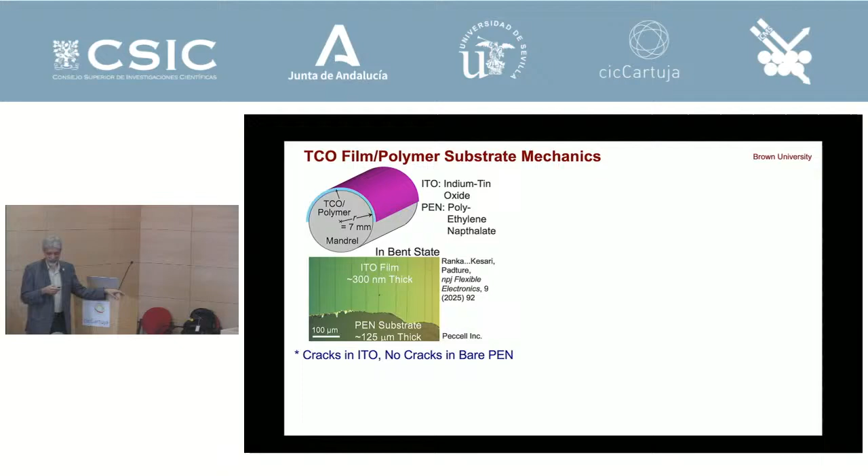And so this is very normal. Hundreds of papers are published on this kind of work, and you normally think, yes, ceramic cracks, polymer doesn't crack, because polymer is infinitely tough compared to ceramic. But my student decided to measure the toughness. The toughness of PEN is about 55,000 joules per meter squared. This ceramic is about 5, perovskite is about 2. So they're all very brittle materials.

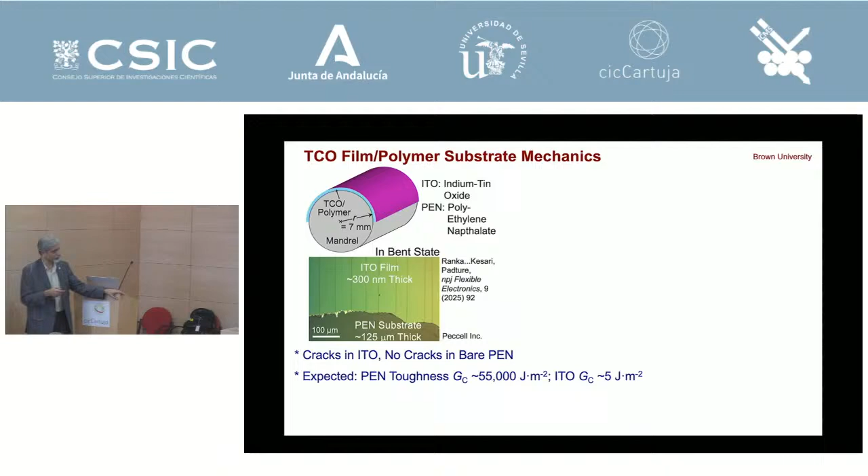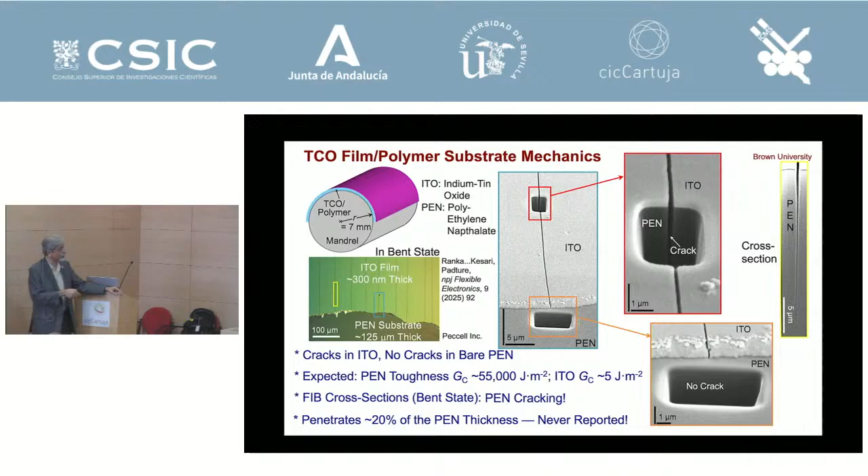And I asked him, maybe this is an artifact, let's do it again. And by the way, these cracks are so deep, 25 microns deep into the substrate, almost 20% of the substrate. So he tested it on different substrates. This is ITO on polyethylene terephthalate. This is IZO, indium zinc oxide, on polyethylene naphthalate. And this is Kapton, polyimide, with indium tin oxide. All of them, some homemade, some purchased.

So we thought that maybe commercial materials do weird things. But this universal phenomenon is where this infinitely tough substrate under a film is cracking like a ceramic. And that's a problem, because if the substrate is like the foundation of your house and it's cracked, you need to worry about it. This gave us a clue that this could be the problem of degradation of these solar cells - your foundation is degrading, so everything on top of it is also going to degrade, becoming unstable. So why is this happening?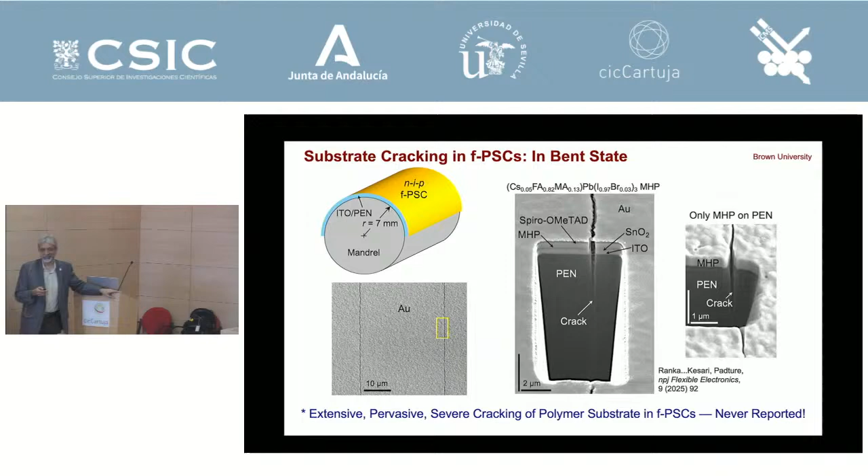So it's really fascinating. Anyway, we found a paper from 1978. It's a modeling paper, nothing to do with solar cells. All it said was that when you have a stiff film on a compliant substrate, then when the crack approaches the interface, the stress intensity factor goes to infinity. There's a singularity because of the stiffness of the film. That's the only difference.

The stiffness of the film is higher than the stiffness of the substrate. So at the tip, when it reaches the interface, it creates a singularity with such enormous K that anything would rip apart under that film, regardless of how tough it is. And so that's what we are seeing here.

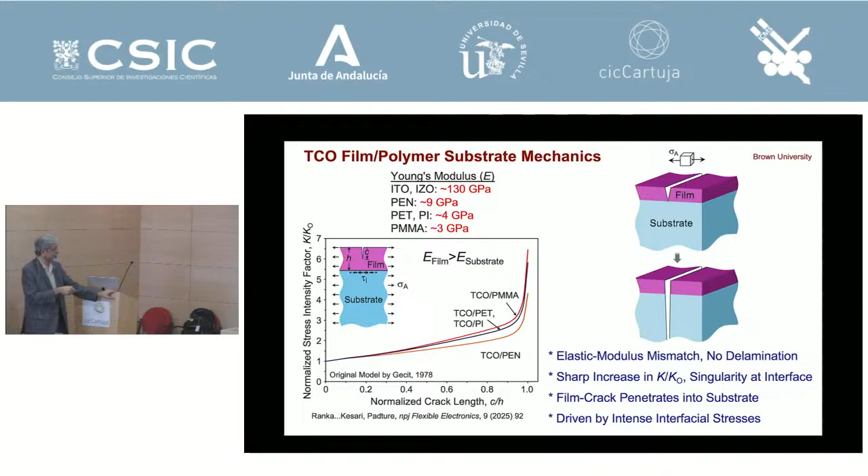And so it's primarily due to this elastic mismatch, right? And so that gave us a clue. Of course, the TCO is 130 GPa, the polymer is 9 GPa, right? And therefore, that difference is why this cracking occurred, regardless of the toughness of the polymer. And this is driven by these intense shear stresses that occur at that point.

If we have a compliant film, low modulus film on a substrate, then actually it arrests, it goes the other way. It doesn't, the film would not fracture, sorry, the substrate will not crack.

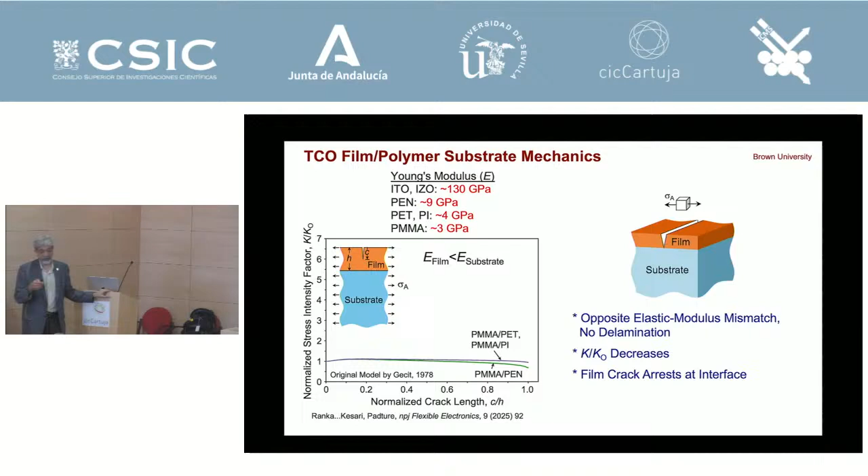So based on that, we created this design map. I mentioned only Young's modulus, but there are actually other elastic properties such as Poisson's ratio, bulk modulus, and shear modulus that go into the picture. And so this is called the Dundur's parameter, alpha and beta. They're basically elastic mismatch quantification.

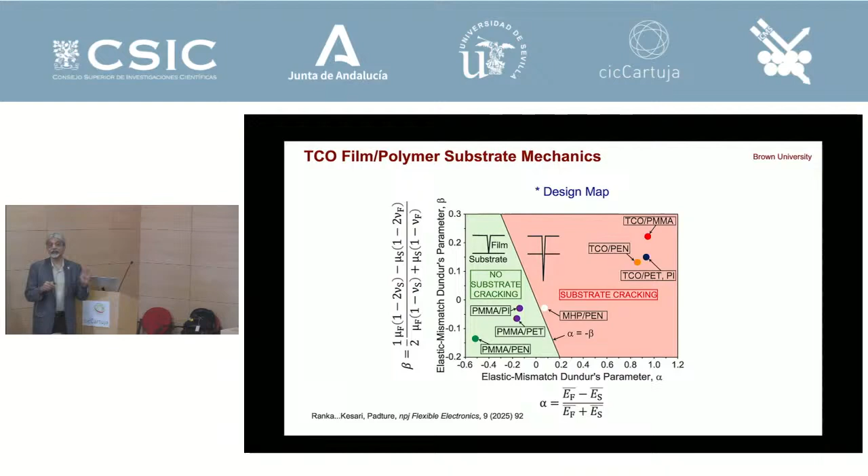So with the green, you're safe, substrate doesn't crack. If you're in the red, the substrate cracks, okay? And so you want to stay away from that.

And so based on this hypothesis, we came up with an approach to mitigate this. So I'm an engineer - yes, understanding is great, but what are you going to do about it? How is society going to benefit from your understanding? And so we always think about it that way.

So using this map, we designed a mitigation strategy where we put an interlayer, which is lower modulus than the film and the substrate. So when the crack comes from here to here, it's going from stiff to compliant, and so the crack will propagate. But now the crack is going from compliant to stiff, because the interlayer is more compliant than the substrate. Now the stress intensity factor actually goes to 0 and the crack will not propagate.

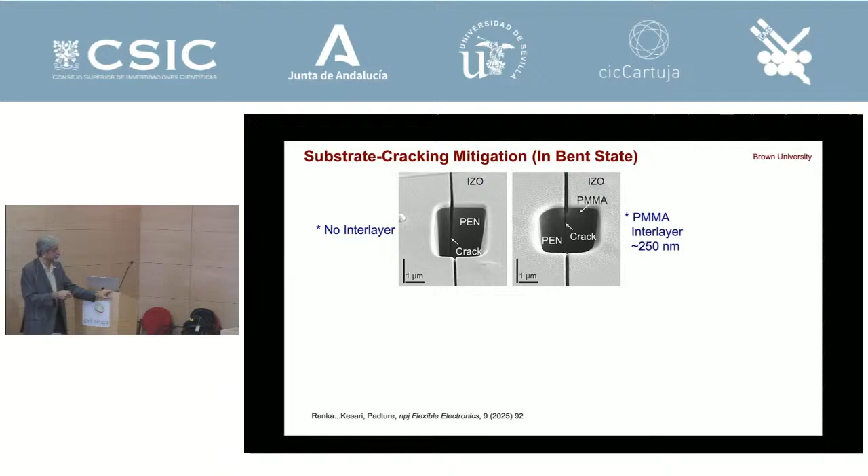So we chose PMMA, polymethyl methacrylate, which is about 3 GPa, the substrate is 9 GPa, and the film is 130 GPa. My student made these without the interlayer, and of course this cracks. With the thin interlayer, about 250 nanometers, it still cracks. But when you have about 300 nanometer interlayer, the crack stops. And of course, when you go to a thicker layer, it stops.

Then we use a different interlayer with PET, which is also lower than PEN, and the crack stops. And now we have a way to stop the substrate cracking and hopefully improve the reliability of the solar cells.

And the reason this is happening, the hypothesis is that when you bend it, the film cracks, the substrate cracks, then when you make it flat, the film comes together, there is contact, there's no infinite resistance, there is some conductivity. But because of the substrate cracking, every time you do this, it's not closing quite properly, because you can get debris and the closing is improper.

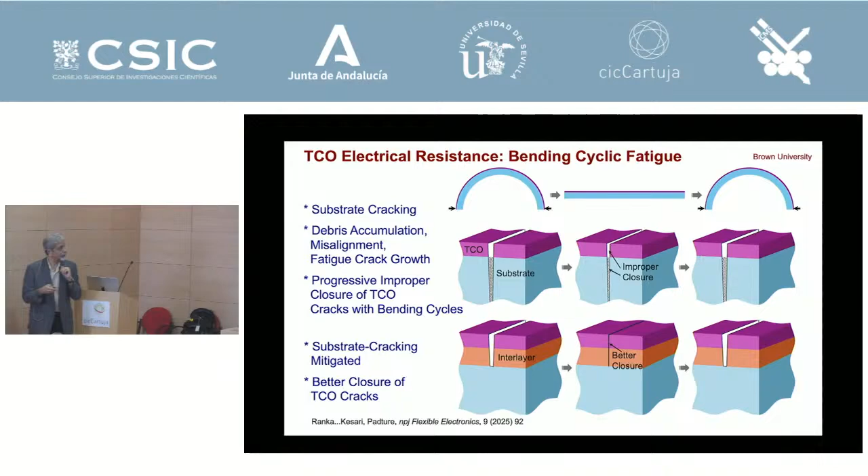And this has been shown in other systems, in metals and things like that. And so therefore, the resistance keeps increasing with number of cycles because you cannot close, make the contact properly. But if you prevent the substrate cracking, then you can actually have better connection between the ITO layers.

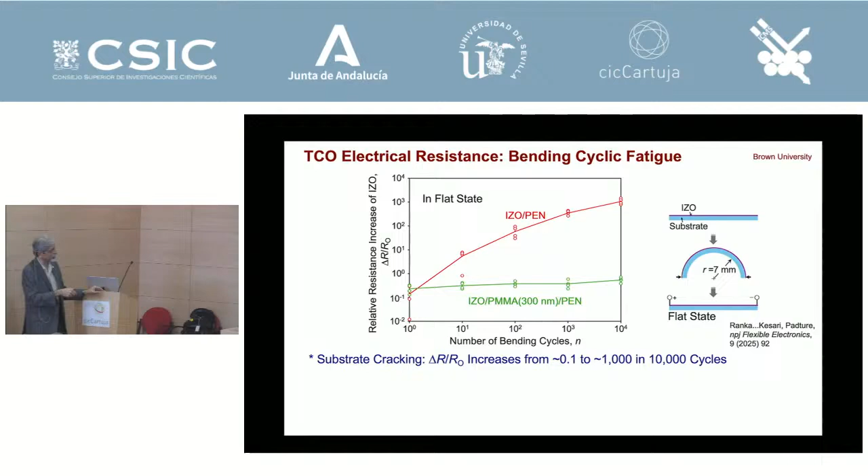And so that's what we show here. You get 4 orders of magnitude change here, but with the interlayer, where the substrate doesn't crack, the resistance really remains almost the same over 10,000 cycles because the substrate did not crack. So whenever you made it flat, the coating came in contact to pass electricity.

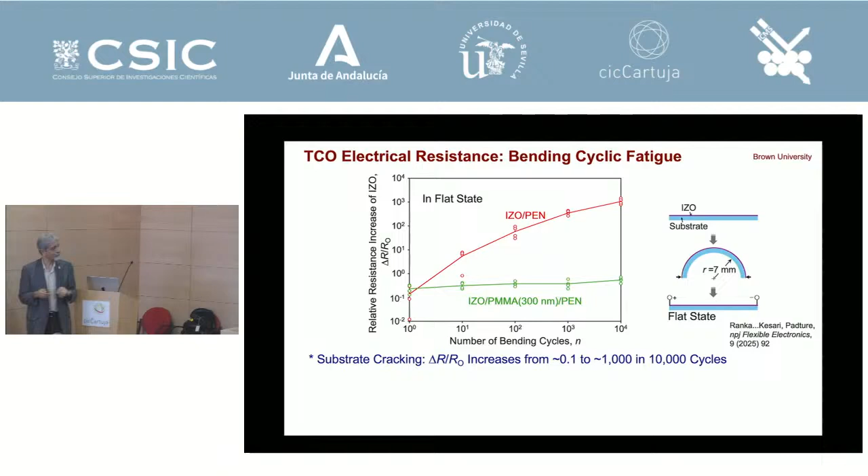Anyway, so it has very broad implications because ITO on polymer is not only used for perovskite, but also organic photovoltaics, lighting, all the displays, touchscreen displays - they all have this ITO on polymer. Then you have these bending phones, Samsung phones, and Apple is coming out with a phone. You can look at the radius.

We are bending this at 7 millimeter radius. That radius is 2 millimeters, or 1.5 millimeter bending radius. The stresses there are enormous, right? So all these things have become relevant in these different kinds of applications.

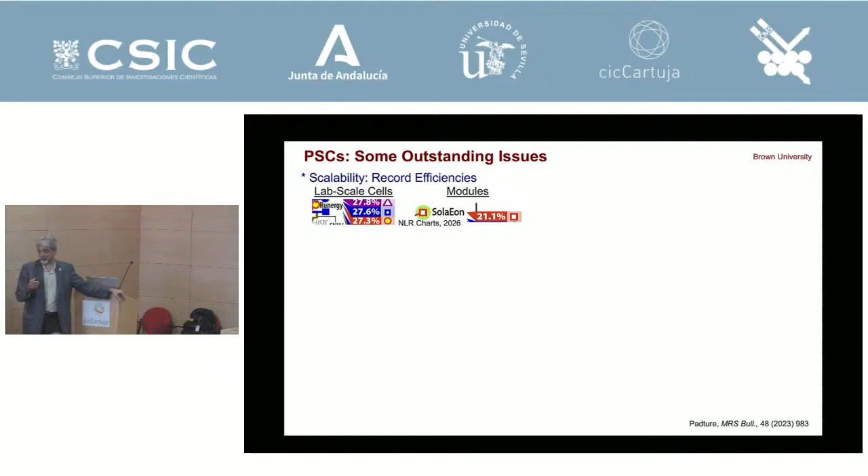All right, so one last slide. What are the outstanding issues? The record efficiency that I showed you is for small solar cells. When you go to modules, which is what you'd need in a solar panel, the efficiency is only 21%. Doesn't come near close to silicon, okay? And so scalability is important. So how can you scale this and achieve the same efficiency?

Then stability is important, inherent stability. And then we talked about, okay, we didn't have a chance to talk about this, but these are dynamic solar cells compared to something like silicon. It has advantages, but it has disadvantages. So we're going to try and play on the advantages, but these things need to be solved, right?

And then the environmental stability, so all of them have lead. And if some of the chemists in the room, they will know that each element has a unique position. Yes, there is the periods, but if you replace lead with tin, for example, it has two redox states and it readily oxidizes into the 4 plus. Solar cell is dead because it doesn't absorb light. It's different crystal structure, right?

And so you have to worry about these things, lead especially. In utility scale, that's fine, because actually there's more lead in silicon solar cells in the soldering than these, because they are very thin. So if a solar cell breaks, the amount of lead that goes in is actually less than the naturally found lead in the soil. But people have a perception, right? People say, no, lead is dangerous, right?

And so utility scale, it's sealed off. Nobody can go in there, and they can recycle it and everything else. But consumer electronics, things like tents and drones and things like that in people's hands, they don't dispose of it properly. And so therefore you have to worry about that.

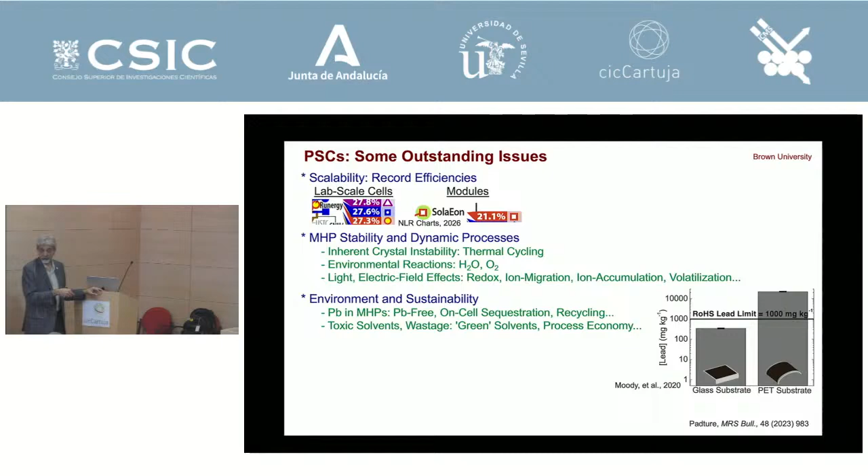So right now this European limit ROHS is like this. So if you have solar cells on glass substrate, it's actually under the limit, because the denominator is the total weight of the device. But if you make it on plastic, it is way off. But right now ROHS is not enforced because it's renewable energy. So renewable energy technologies are exempt from ROHS requirements. But who knows, things might change, right? So we need to worry about those things.

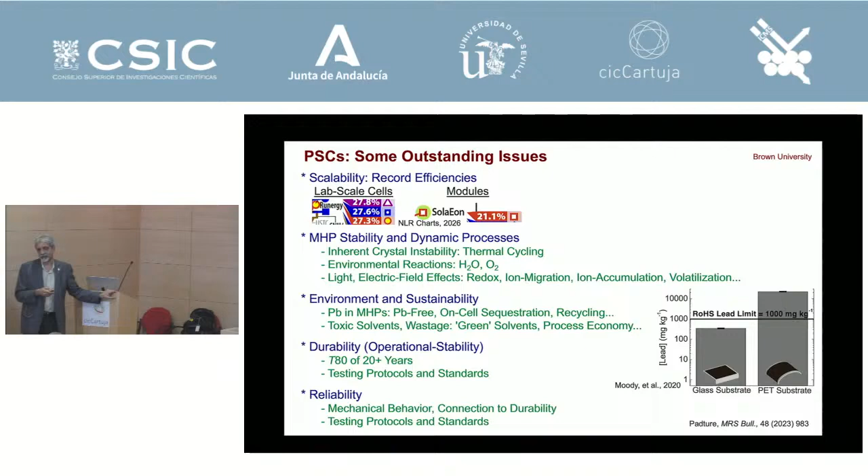And then operational stability and reliability, as I talked a lot about. So these are a lot of the outstanding issues. And then of course there could be new materials, new light absorbers that we don't know of, from these millions of compounds, right? Anyway, so this is what I wrote in this review article: the prize of widespread commercialization of the perovskite PV technology and the prospect of doing fascinating science along the way make addressing these challenges a worthwhile endeavor.

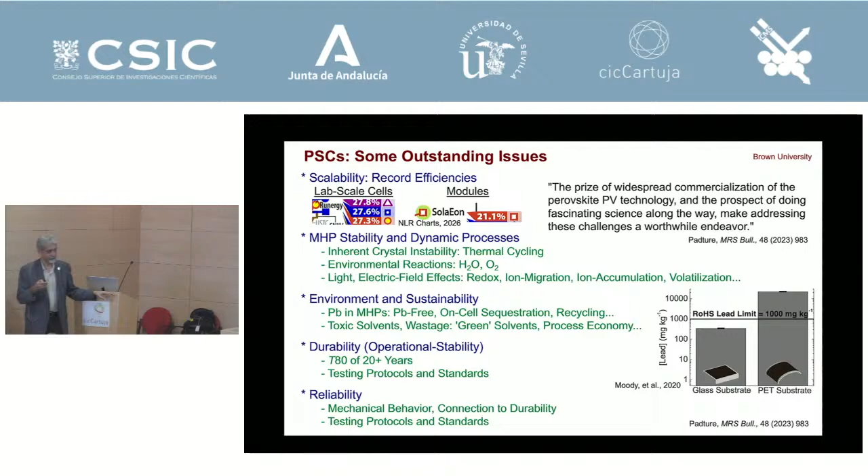So for any postdocs and students out there, or PIs who want to get into a new field, this is an exciting field, especially in Europe. In the US, funding for renewable energy is down, but hopefully it will come back up again. And so if you're interested, I've written these review articles and some perspectives on mechanics and so on.